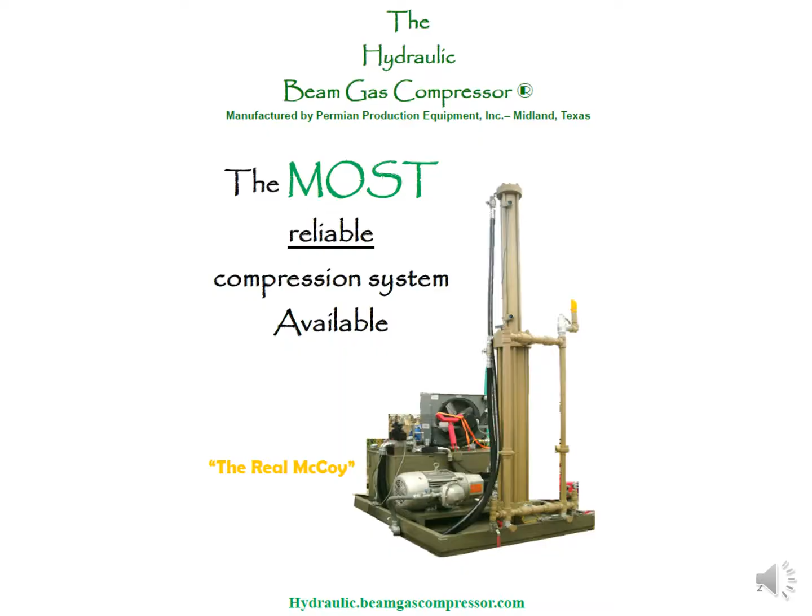You know, but the whole deal about this is all about pressure. Everything you do day in and day out in the oil field is all about pressure. Either you got too much of it or you don't have enough of it. So trying to get rid of it is what man has always been trying to do with oil wells.

You know, but a lot of times oil wells have a mind of their own. And a lot of times they want to get rid of pressure when they want to get rid of pressure. And sometimes you have stuff like this happen, because there's too much pressure in some part and it found a hole. And then sometimes this happens. You know, but everything we're going to talk about is all about pressure. Everything in any of these classes is all about pressure.

And my boss was in the Monahans sand dunes in the 1980s with a Gulf Oil engineer, and they were looking at plunger lift at that time, because that was a big thing for shallow wells. And they drove by a pumping unit, and the pumper had just blown down the well. He had run the piping back through the sand dune so it wouldn't be close to him when he blew it down, because it had H2S in it. But unfortunately a covey of quail happened to be running past at the same time he blew it down, and it killed the birds.

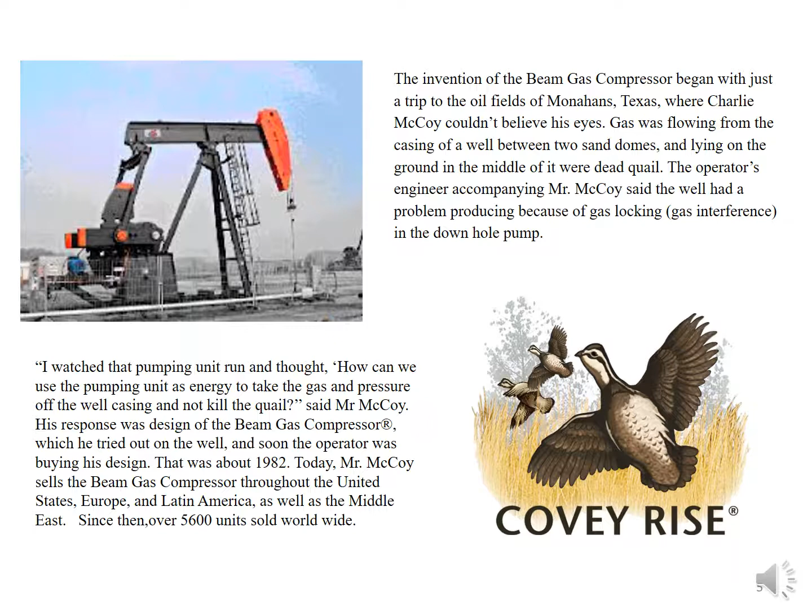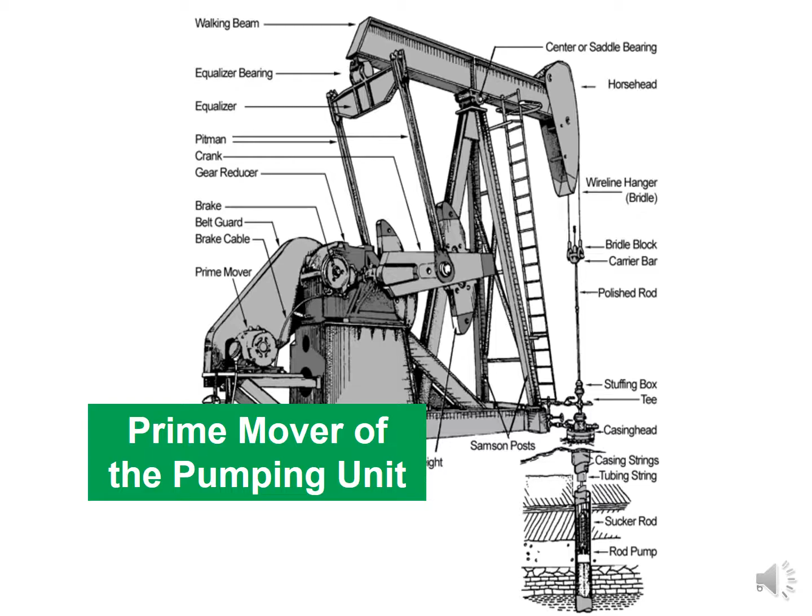And my boss, at that time and still to this day, is a big birder. So from a conservation standpoint, he wanted to know, how can I blow down that well in an environmentally friendly way and not kill the quail? And that's how he came up with the beam compressor, which has been our main product, because he saw that he had this big pumping unit that just goes up and down and hardly needs service, and it just operates and runs. He figured out that he could put a cylinder inside of that structure.

How many ever heard of Arm & Hammer? Arm & Hammer for decades had one product. And then all of a sudden somebody accidentally left it in the refrigerator, and now they had two products. And then that just emerged.

Well, in the 80s, you could not find a brand new pumping unit, because there was an oil rush going on, and Lufkin was pretty much the only choice. So if you had a 640 pumping unit on a well making 5 or 6 barrels a day, and you just drilled a well that needed a pumping unit for 50 or 60 barrels a day, you were screwed. So what Charlie did was create a pneumatic lift system where he put a cylinder over the top of the wellhead, added a piston rod onto your rod string, and stroked that rod pneumatically. That allowed the operator to take that 640 pumping unit and put it somewhere else.

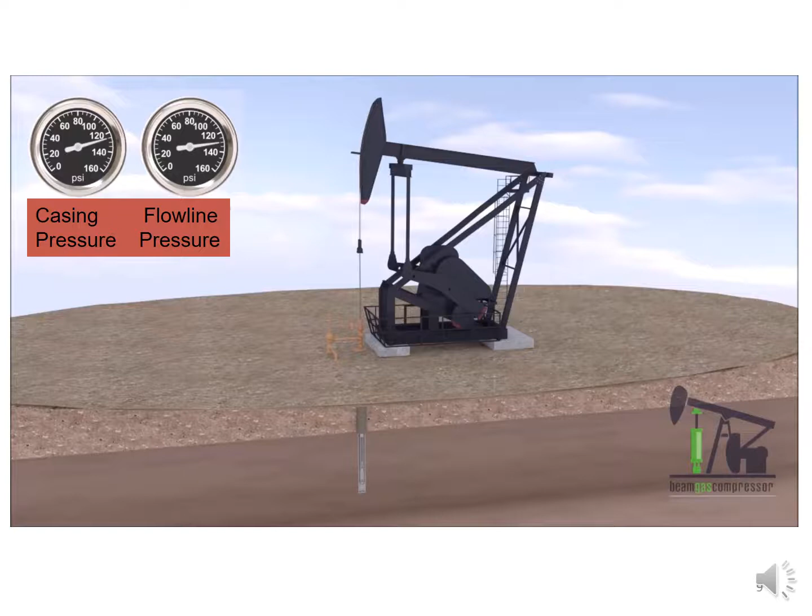So he already had the basic idea that if he just took that pneumatic cylinder and put it inside the structure of the pumping unit, now the pumping unit can give him all the action as it's pulling this piston up and down. And these systems are in all over the world. This is an example of how we work. We're all about, once again, pressure.

Bottom hole pressure is made up of what? Casing pressure and your hydrostatic head. So to lower bottom hole pressure, the simplest thing to do is get rid of the casing pressure. And that's what we do with our systems. So if you had a typical vertical or horizontal well, what you want is to get as much fluid in your pump as possible. But what causes you problems? Gas pressure.

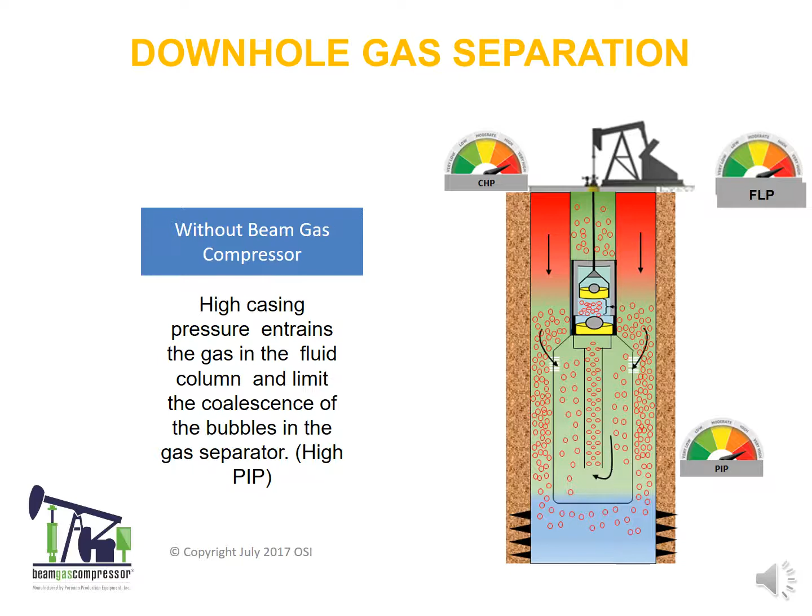Either the gas, because you have high casing pressure, the gas will go into the pump, or it'll just be in a place where you don't want it to be, and it affects your operation. But if you go and get rid of that casing pressure by installing a beam gas compressor, you can drop your suction pressure and discharge into the flow line as before, but now you're giving the casing gas a different place to go because you've taken it off the well.

Now the gas is going to go up the annulus. As the gas goes up the annulus, think about opening a bottle of beer. When you take the top off, instantly foam is created. As the gas bubbles go through the fluid, they create foam. But if you just let that bottle sit there, gas bubbles will continually go through the fluid, and it lets that fluid be less dense. If you just had the bottle with the cap on, the density of that fluid is much more than with the cap off. Same thing for an oil well.

So if you're trying to lower bottom hole pressure by getting rid of casing pressure, you also create less dense fluid. Most horizontal wells you normally run with 1,500 to 2,000 feet of fluid over the pump because you can't pump it down, the gas goes into your pump. Unless you do something else, like get an Odessa separator, a heel system, or a Predator, or something to try to keep the gas from going into the pump.

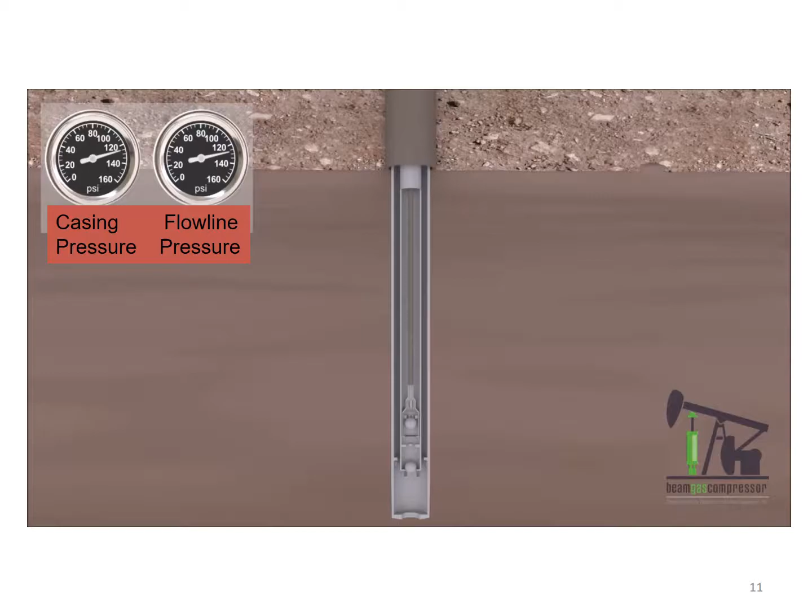What we suggest is let's get rid of the casing pressure first before you go and do something downhole, because it's a whole lot cheaper to work on something on the surface. A lot of people already have a Mother Hubbard in the pump. If you have a Mother Hubbard already below your pump, and we take the casing pressure off, we're going to give you more fluid because we're going to give you a lower bottom hole pressure.

Now the only problem you run into with horizontal wells: we did this for Oxy five years ago. We put 3 compressors on some wells they had in Carlsbad, and at that time they were running 90-foot tailpipes. All we did was make their gas interference worse, because once we took the casing pressure off, the gas wanted to move faster to the well bore, the vertical side.

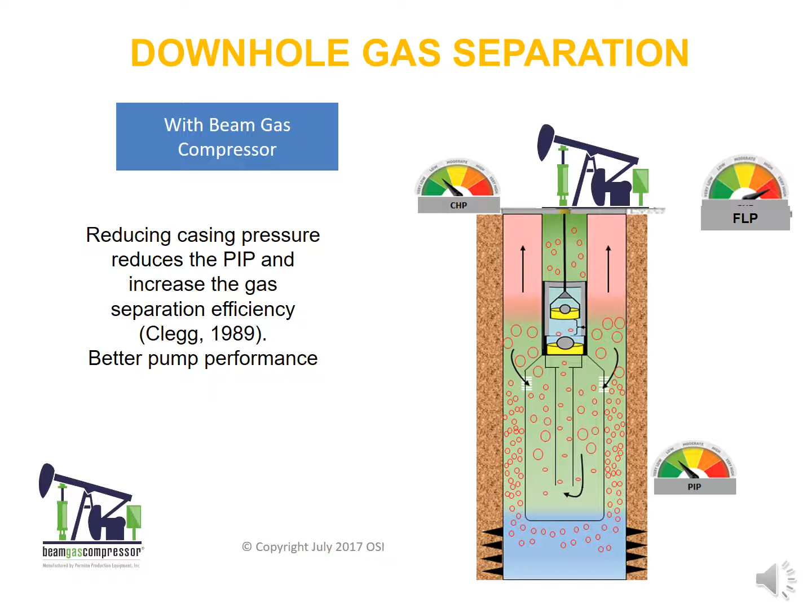And when that pumping unit stroked up, it just created a greater differential and maybe sucked more gas up that tailpipe. I'm sure you've all heard of water getting sucked up the tailpipe - same thing happens with the gas when it goes up that way. And this is the reason.

What we get into with gas and fluid is this - where's my pointer? Now I can use it. These are your gas bubbles when they're entrained in the fluid. They're small. But as soon as we lower the casing pressure above it, we're going to make those bubbles get larger and they're going to move at a faster velocity.

Now, one of the big deals with horizontal wells used to be up in the Bakken was that they'd foam - they produce fluid up the backside. I can take a well that's got 600 pounds of bottom hole pressure, and as soon as I take the casing pressure off of it, it's going to foam.

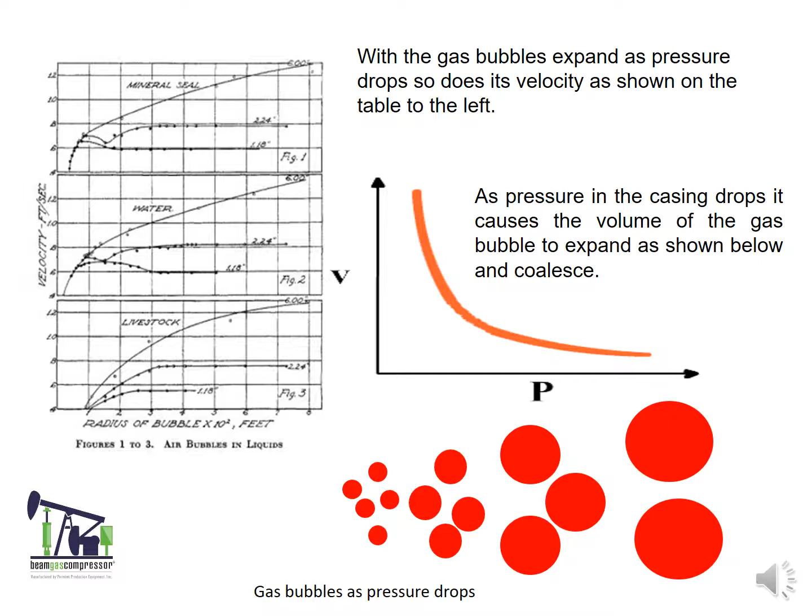Because even if it's 7,000, 8,000 feet deep, when I take that gas off, I'm going to make gas push that fluid to the surface, and it's going to come right up along the casing in the annulus. And my compressor doesn't really like that, because our beam gas compressors were designed to have relatively dry gas. We can handle high BTU gas, but if you send me a slug of fluid, I'm not going to like that.

But on a horizontal well, you have a well that already has a tendency to foam. And it has a tendency to foam because you have this long corridor of fluid and gas constantly going through it. It just keeps getting agitated, that's all that's going on. It's not really because the fluid wants to foam, it's just because you've got so much of it and gas rushing through it, it's going to foam.

So when we take the casing pressure off, we're going to make that even worse unless we figure out how to stop that.

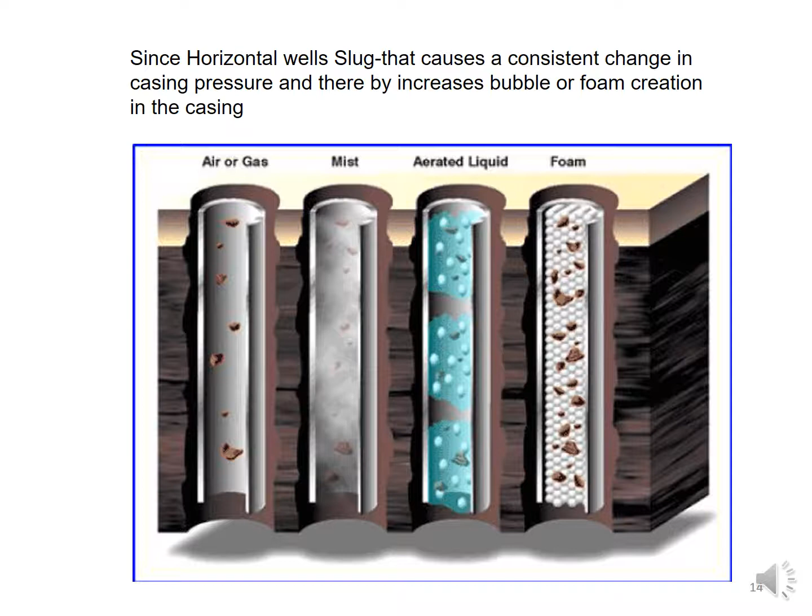So this is a well for EOG up in North Dakota. They had a horizontal well making about 150 MCF of gas. So what they did, they hooked the beam gas compressor to discharge the gas back in on this side. The operator took this video, but he started backwards, starting from the back end.

Here's the line going up to the beam gas compressor. They're non-lubricated, so pretty much they just sit there and run. There's not a whole lot to mess with on them. Then you come down here, here's the suction side. That's my boss there standing in the way of the filming. And here's the suction line where we suck the gas off of that line.

Because it's a horizontal well and they had 750, 800 pounds of bottom hole pressure, we had them put a vessel over here on the side so it would capture any fluid that came up. The cost for us doing this is about $25,000, and then the vessel, they just had one out in their yard. So here, we can lower casing pressure very well on a horizontal well as long as we got some way to keep the fluid from, when it comes to surface, so we can stop it. But that gets to be problematic.

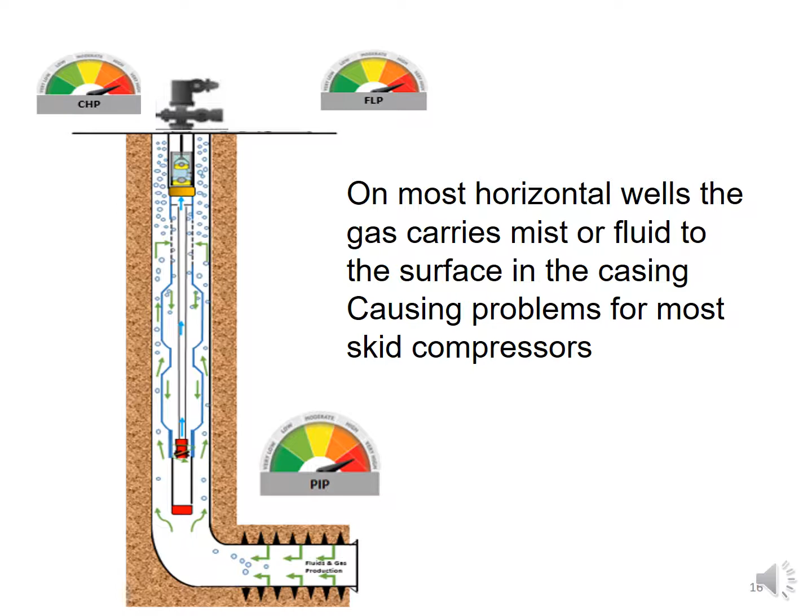What we started looking at, okay, now here you have a horizontal well. This has an Odessa separator in it. They've got casing pressure, flow line pressure, bottom hole pressure, pump intake pressure. But as soon as we take that pressure off, we're going to make everything work better because we get more pumping pressure, but we also start slugging that well a little bit more.

So what we designed was a hydraulic system to go on top of the wellhead instead of going on the pumping unit. And the hydraulic system, you'll see here later, is really slick because we don't care if I get straight fluid, straight gas, or a mixture, because I can move it. Typically all I'm trying to do is move it from off the annulus and back into the wellhead so that this horizontal well can continue to produce.

Now we talked about pressure. How many of you guys run ESPs? What's the worst thing in the world to happen with an ESP? Casing pressure go from 100 pounds to 200 pounds, or 100 pounds to 20 pounds - you know, they don't like that. Most wells don't. And if you put a typical skid compressor on the surface on an ESP and you pull the backside on, you're going to do real well for a period of time until the scrubber tank fills up.

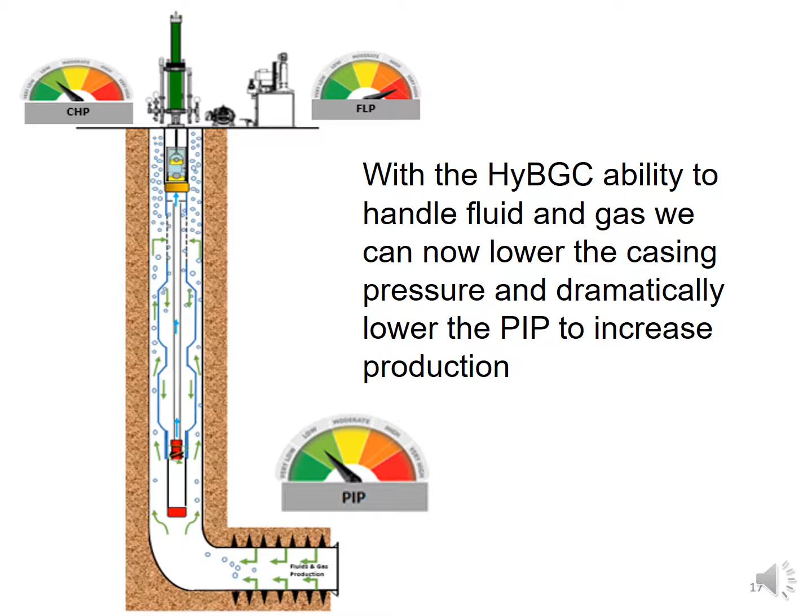And then that scrubber tank, once it fills up, it's going to do something. If it's through automation, it might have to pump all that fluid out, but more often than not it shuts down. And when it shuts down, your casing pressure goes back up. So that's really not a good thing for your ESP or your downhole equipment.

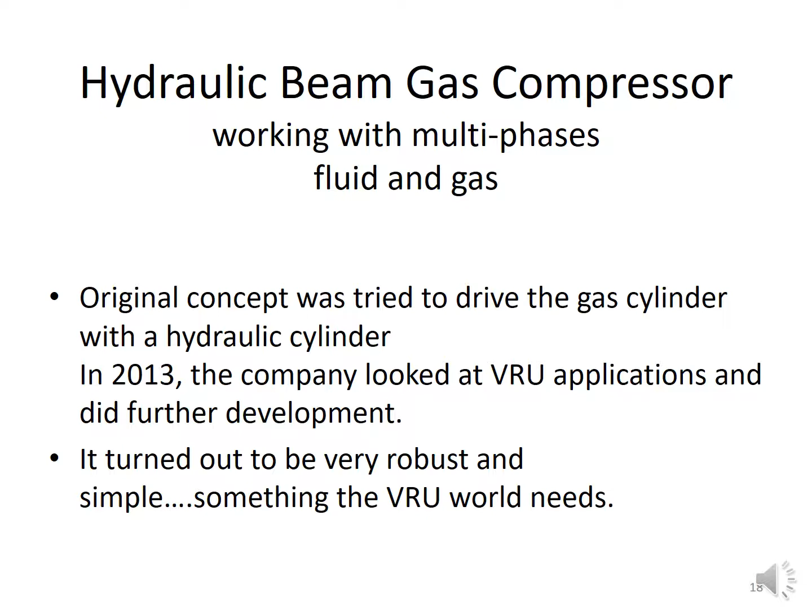So what we started doing, actually about 15 years ago, was developing a method that we could drive our beam compressor - that's been around for 40 years - with a system that's been around for 100 years. This hydraulics has been around forever.

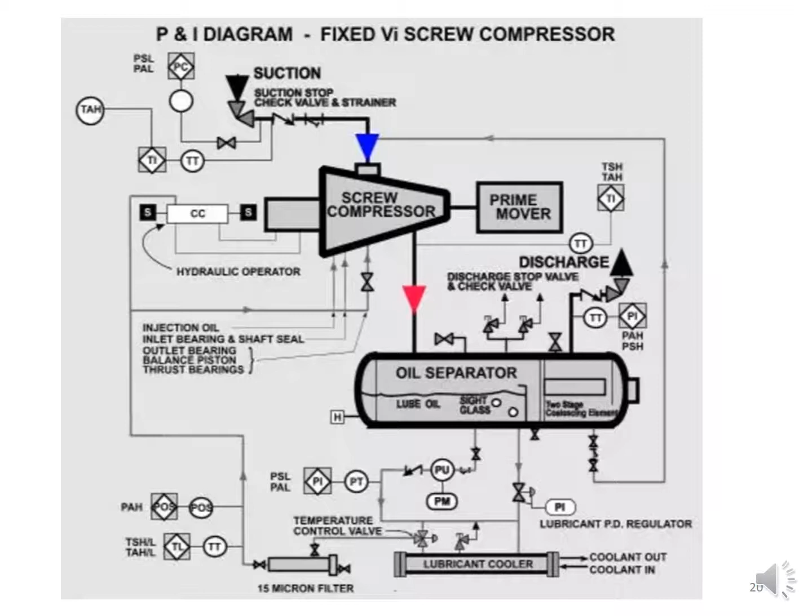This is the difference - these are all the different things that we don't have to have compared to our competitor. The thing I think about the most is that we're very simple. I like to consider myself simple-minded, and simple is a whole lot easier. With this type of system, you don't need one mechanic for every 6 units - you can have one mechanic for hundreds, because the problems you're going to have are yearly, not weekly or month by month.

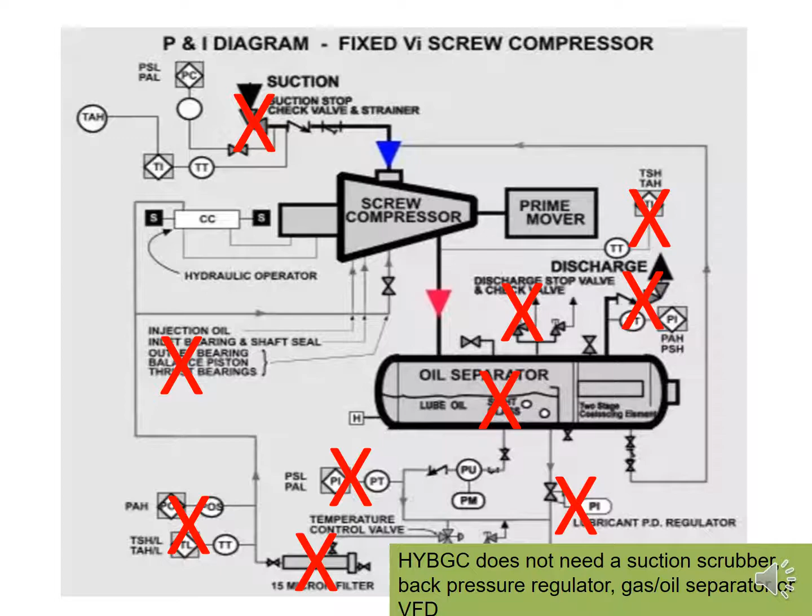So we might short stroke for a period of time until we push all the fluid out. We might raise the casing pressure - instead of it being at 5, it might go to 7 or 10 until we get all the fluid out. But we don't have to worry about it.

One of the big applications for horizontal wells - I don't think I've seen it too much in the Permian - is allocation separators. When you have 6, 7, 8, 10 well pads, normally the Railroad Commission likes to know how much each well is making. So the solution has normally been that you take this big allocation separator, set it on your big pad, and drive all your fluid into there so you can measure everything going to that allocation separator.

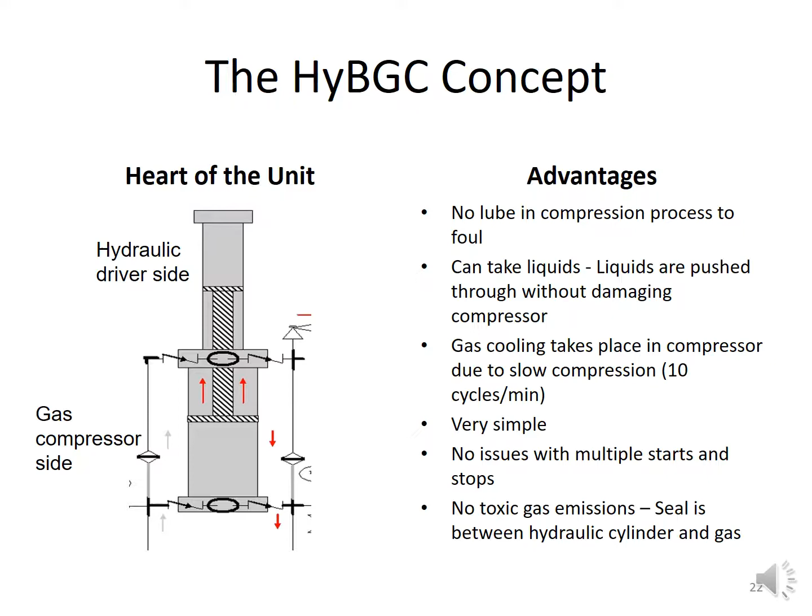Then the allocation separator has to build pressure to send that fluid to a battery. But as soon as you build pressure in that allocation separator, you're building pressure on all your well bores. By putting my system on the outside of that allocation separator, I can lower the pressure in the allocation separator to 15 pounds, whatever it takes to dump, and lower the pressure to all of the wells in the pad. Then I can compress the gas back in the flow line and use that to push back up to 200 or 250 pounds to push all the fluid to where you're trying to get it to. With one simple thing, I can increase production on a large number of wells.

So this is what happens - how many are familiar with hydraulics? You see it all the time on the garbage truck, with all these devices that have rams and stuff, and they just work. There's just not much to them.

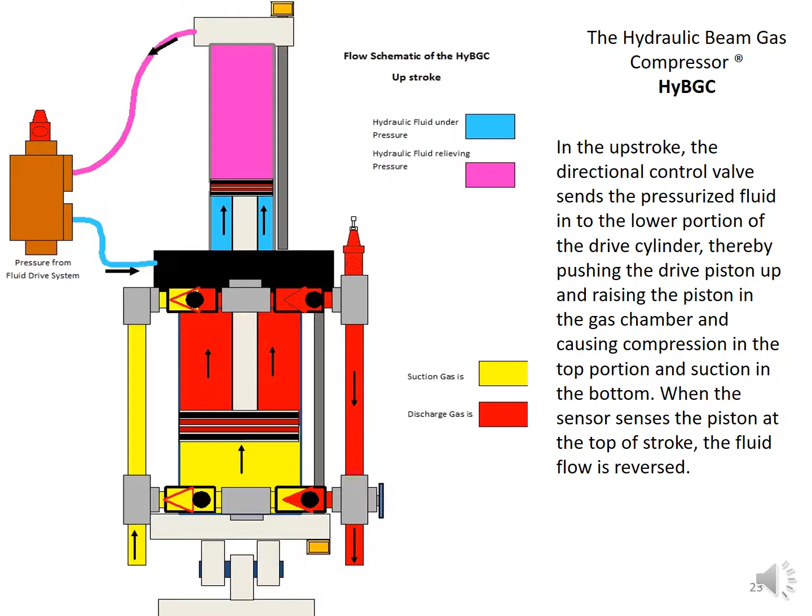The heart of it is the directional valve, which basically either goes this way or that way. If it goes this way, it's sending fluid to the bottom of my device. If it goes this way, it's sending fluid to the top of my device. Depending on which way it's going, that depends on which way this moves. So right now it's going up, and now it's going down - that's the action of the system.

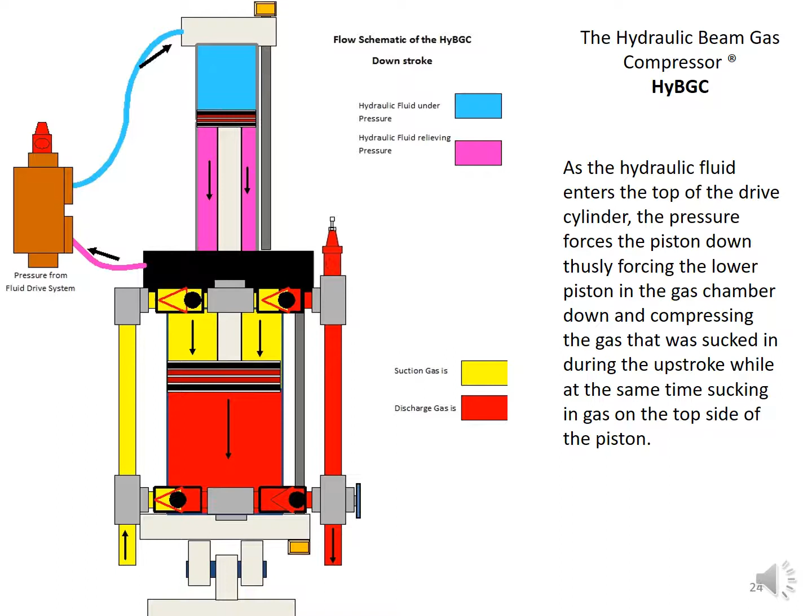There's really nothing more complicated than what I've just shown you. It has 4 check valves and a pressure release valve on it. But one of the interesting things about it is we're dual acting, just like our beam gas compressors were - we compress up and down. But if we get fluid in it, what happens?

All we do is just keep on running. So we're sucking straight fluid. We've had customers buy them, like in Alaska, just to move fluid off of a Rotaflex.

It's not going to bother our system because we design it to run with the fluid. We don't need to scrub it out. We don't need to have dry gas going into the compressor. None of that's worrisome to us.

Because inside the structure of the hydraulic system, we have a proportional valve, that directional valve I showed you. How much the valve goes left or right depends on what kind of suction pressure, how fast I want it to go. You guys are typically used to variable frequency drives, but most people don't like VFDs because they're a pain in the ass. They're very persnickety.

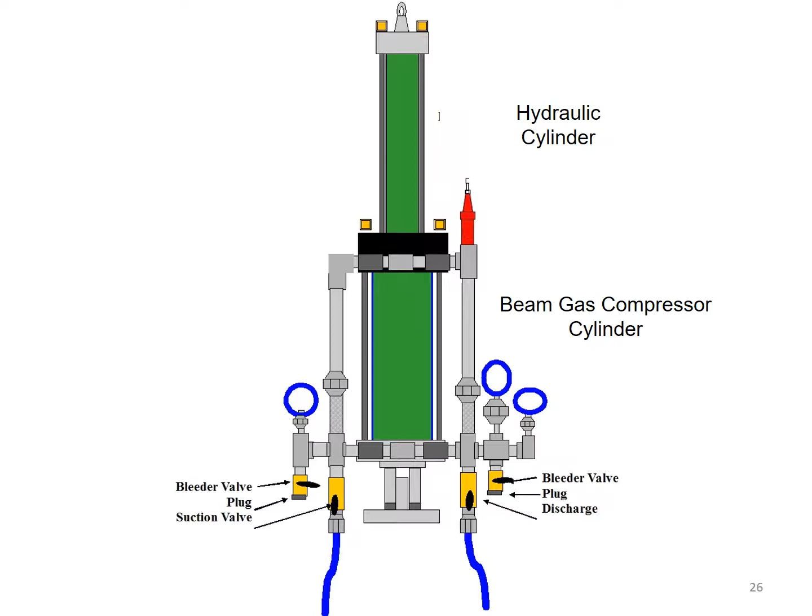Well, here we can take a proportional valve, and depending upon whatever kind of programming you have, we tell that proportional valve - it's a 4 to 20 milliamp signal. Depending on how far you want it open, that tells the valve how much fluid to send to the system. Sends more fluid, I go up and down faster. If I don't need to go that fast, it sends less fluid and I just go slower. But I don't require anything super special like a VFD in order to accomplish that.

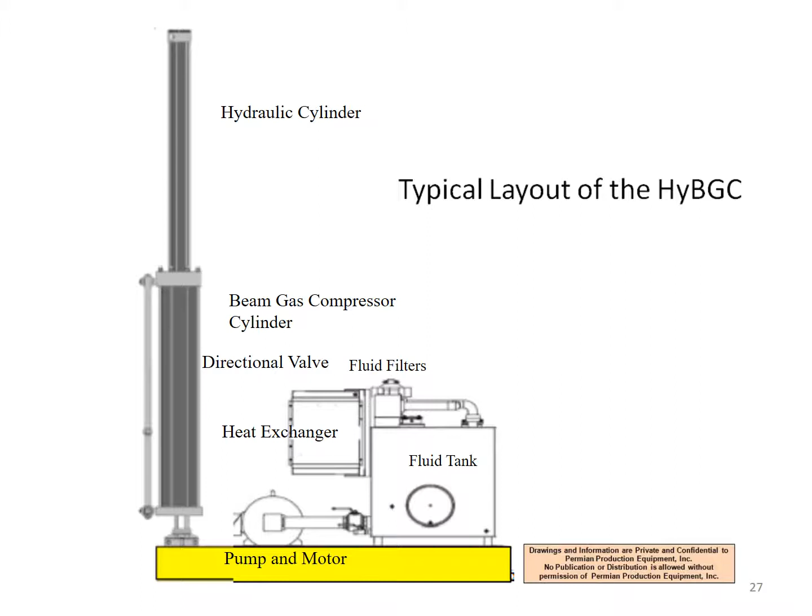We do not provide you a control system because you already have people trained for that or used to that. We can use a Lufkin SAM unit, or whatever they call it nowadays - well control, Allen Bradley, anything that can give me 5 analog ports that I can plug a transmitter to, and I can tell a motor to come on. We've done it with Murphy switches. It's just to make it really, really simple.

So they still had to have a cost, but it was almost half of what our competitors are. Maintenance on compressors equals lost production to an operator - the more maintenance a compressor needs, the less production.

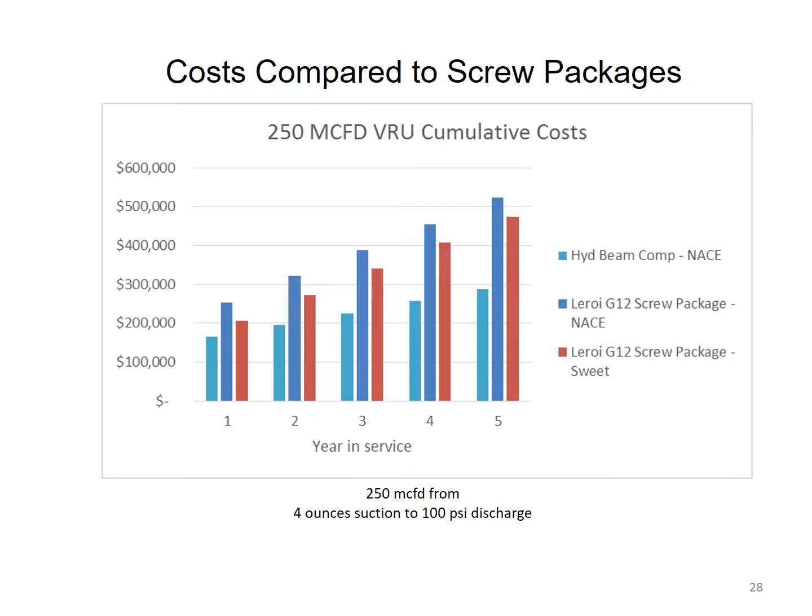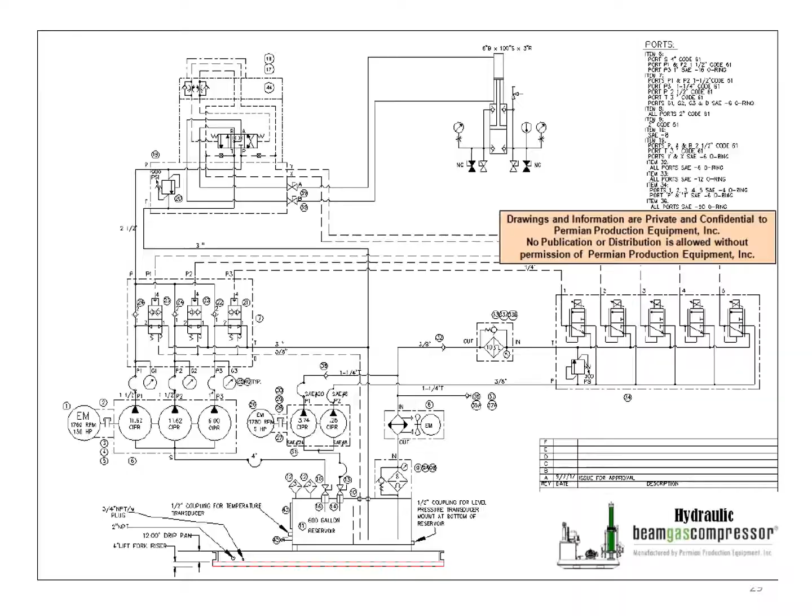All of our systems are basically H2S compliant, regardless of what you're looking at. You know, NACE compliance to us, we're really already there. There's nothing we change to get to be NACE compliant. Gas is going to come into our system, and everything's stainless steel already, 3,000 pounds. So there's nothing we really have to change that's wetted by gas that has to be NACE. Whereas other compressors, they have a lot of components they have to change out.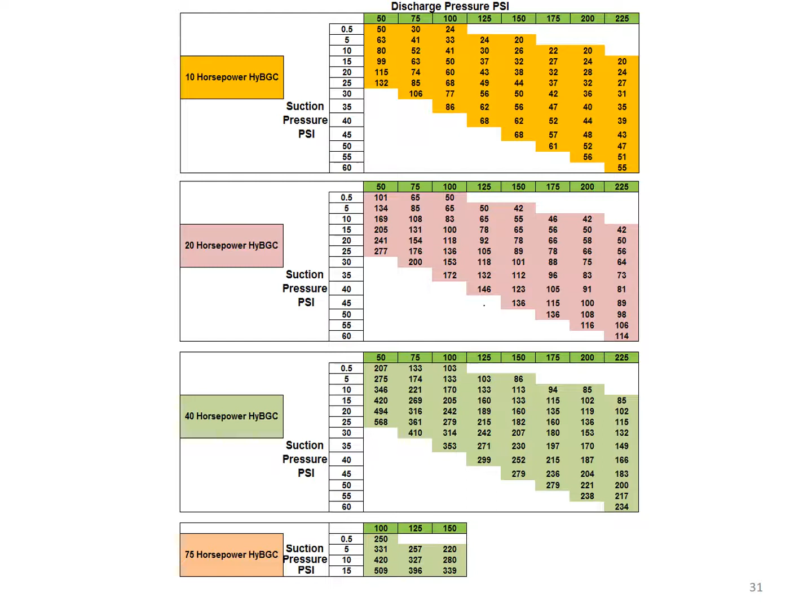But it's a fairly simple concept. I said simple a couple of times. I like to.

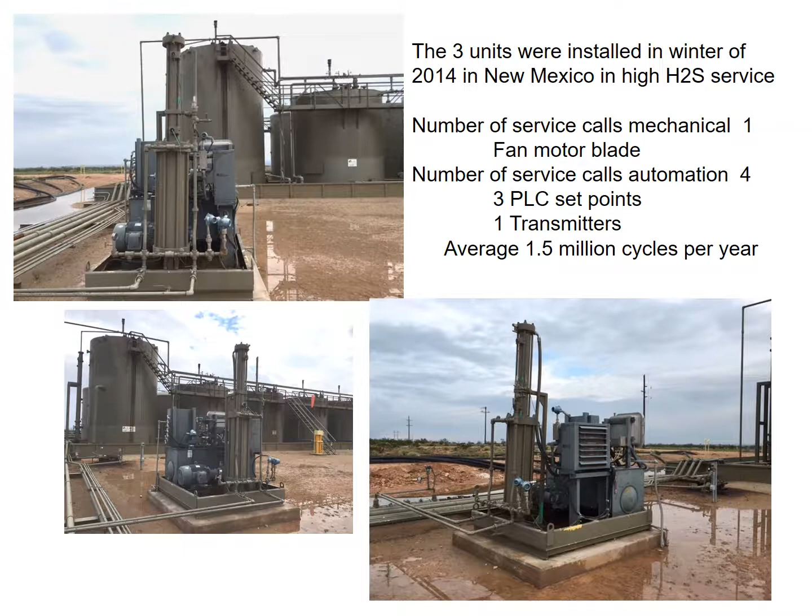These are some different wells that we've got it on. It rained in New Mexico this day, last year I guess sometime. It's just a vapor recovery unit, they just plumb it in, and it just sort of sits there. Now this operator, this is the Allen Bradley panel they put on there, but now they don't put it on there anymore because when they were first doing this, they put it on the skid, and they had to have a Div 1 explosion-proof panel and stuff, and that was just ridiculous.

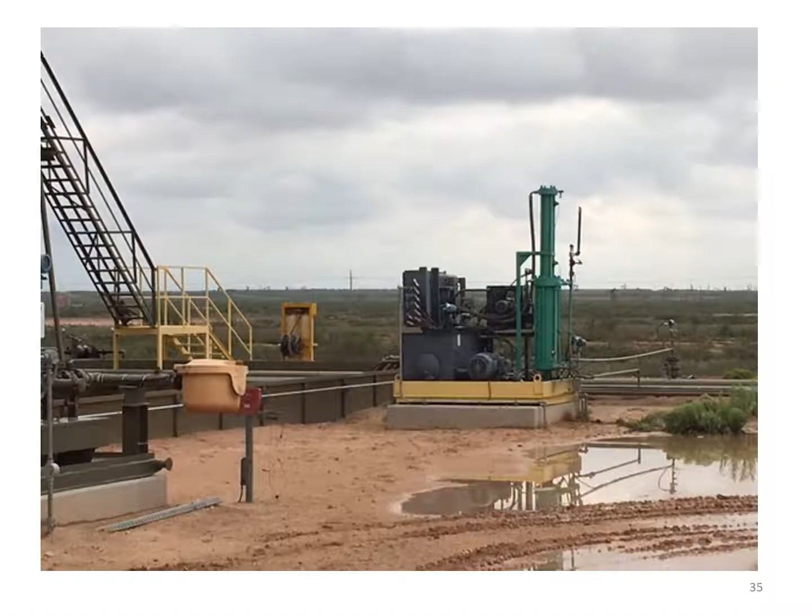There's another one. This is one out here in Odessa. This is one out in Andrews. This was interesting because...

One of the things that happens with gas when you compress it is it gets hot. Most skid compressors run at 3 to 4 ratios of compression, and the reason they run at that ratio is because if they ran faster, they'd get too hot. Well, we run at 9 ratios of compression. Hot is not an issue to us.

My system runs at 5 to 9 cycles a minute. A skid compressor runs at 1,500 cycles a minute. When something's going back and forth that fast, it's going to get hot. With my system, every time I stroke up, I'm drawing cooler gas into the cylinder. Then when I push down, I heat up the cylinder for a split second, but then I'm pulling cool gas back into it. Because there's large volumes of gas, and because I'm running at 9 cycles as opposed to 1500, I don't have the problem with heating the gas up.

So what happens when you heat up gas in West Texas? As soon as it hits the sales line, it cools off, and as soon as it cools off, if it's got any BTU in there, it's going to form condensate. Now you're pushing condensate to your gas plant, and they sort of don't like that. With our compressor, because we're not going to heat up the gas, we're not going to allow the BTUs to drop out. So we just push the gas down, and we don't have any issues with that.

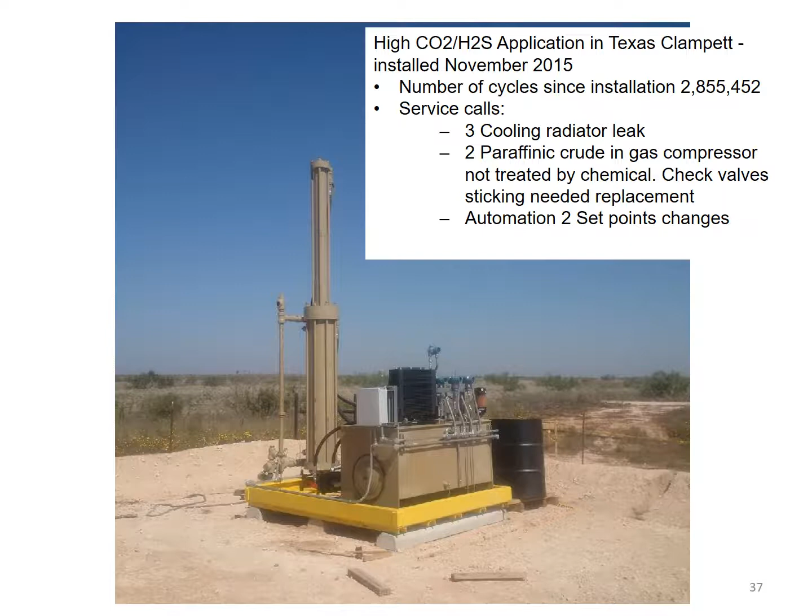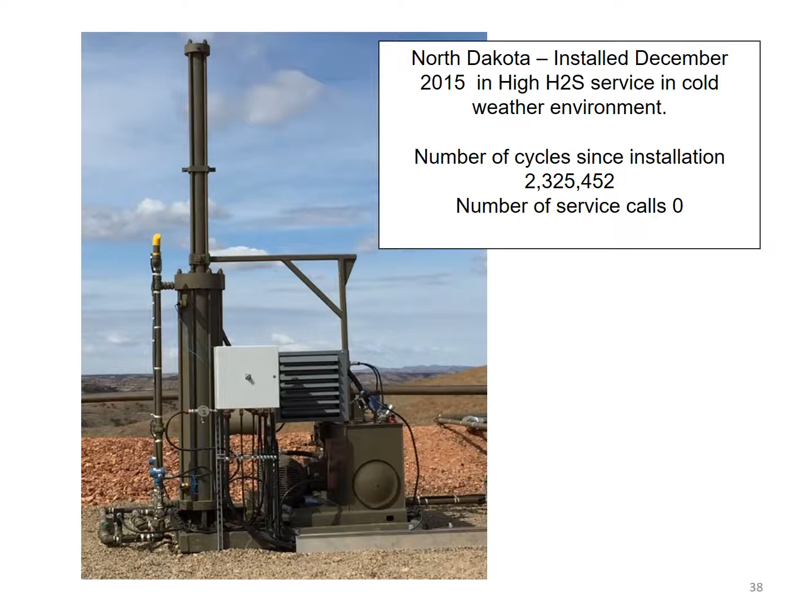It's been working, I guess, when did we put it in? 2015, so it's still operational. And they have yet to pick up the phone and say, Mark, it broke. Because there's just nothing to break, there's just not that much in it.

This is one of our larger systems where we have a 150 horsepower motor. This is a triple vane pump. And this compressor is 100 inches tall, which makes this 100 inches tall, which means this whole thing is real tall. But real tall is okay on most oil pads, tall is not that big of a deal.

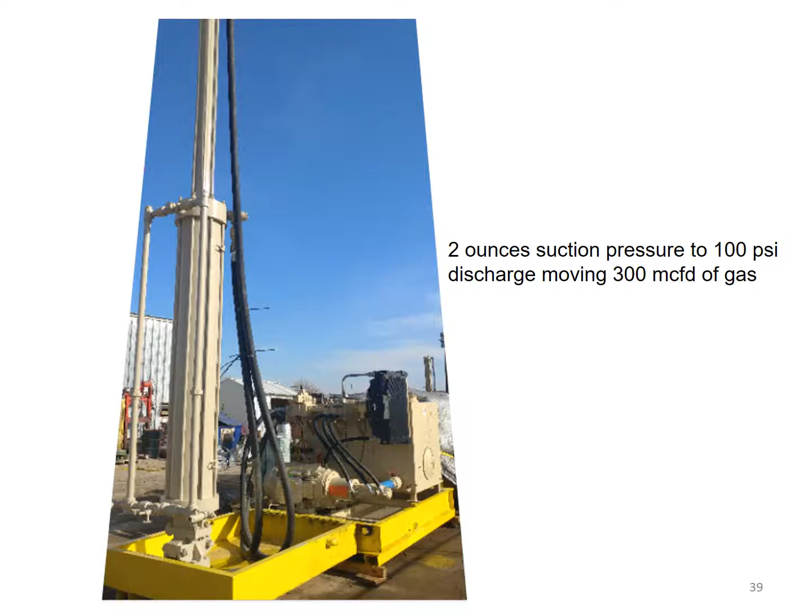And we put it in multiple pans, depending on how much fluid we're going to have, so we have a capacity to hold fluid in the worst case scenario if we get a leak.

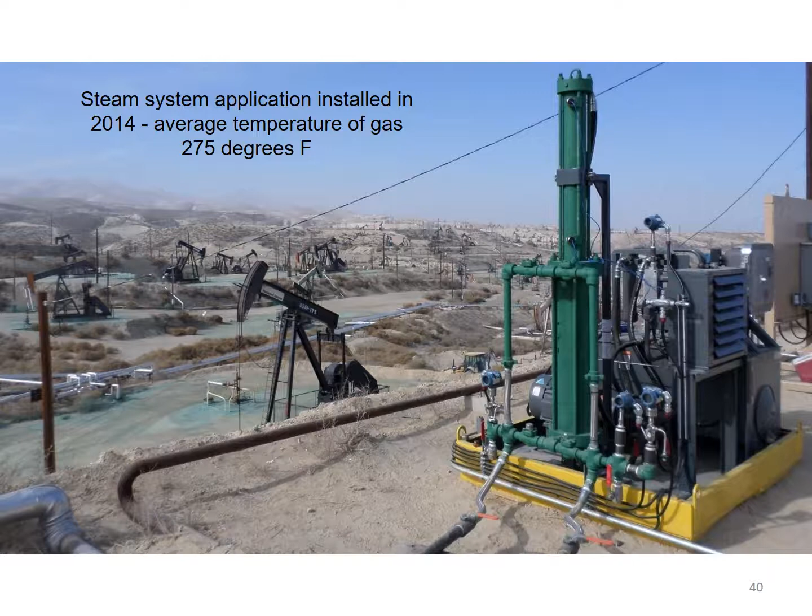This is the well I was talking about that we do for Chevron. This is out in Bakersfield, and they put a unit here so that they can take gas off of 5 different wells as they steamed them up.

Many of you have heard the term blow-by. On a skid compressor, blow-by is a big deal with the EPA, because if you have that piston pushing and compressing gas, gas will seep around that piston seal and go out to atmosphere. It's just going to happen, you're not going to be able to stop it all. So a lot of compressor systems put a different exhaust thing on there so they can capture that and resend it in if they're gas fired, so they can reburn it, or they've got to do a lot of extra stuff for that. I don't worry about it.

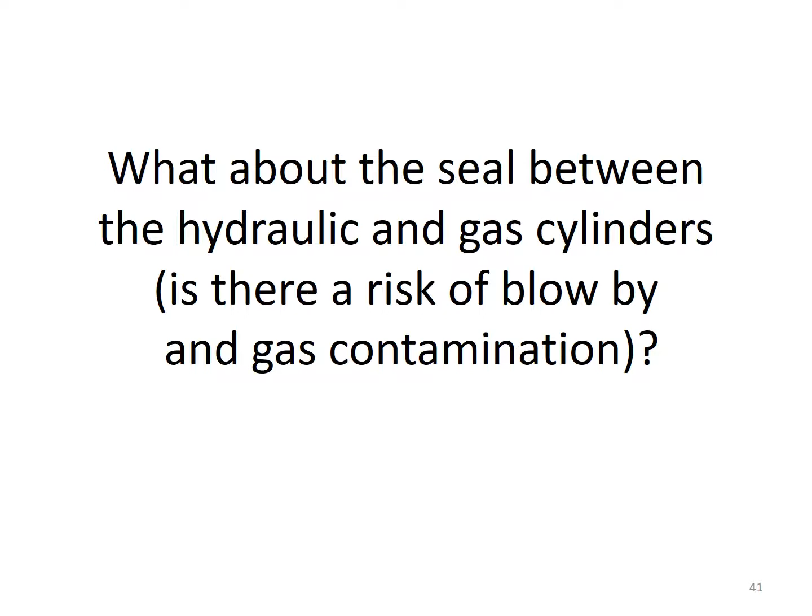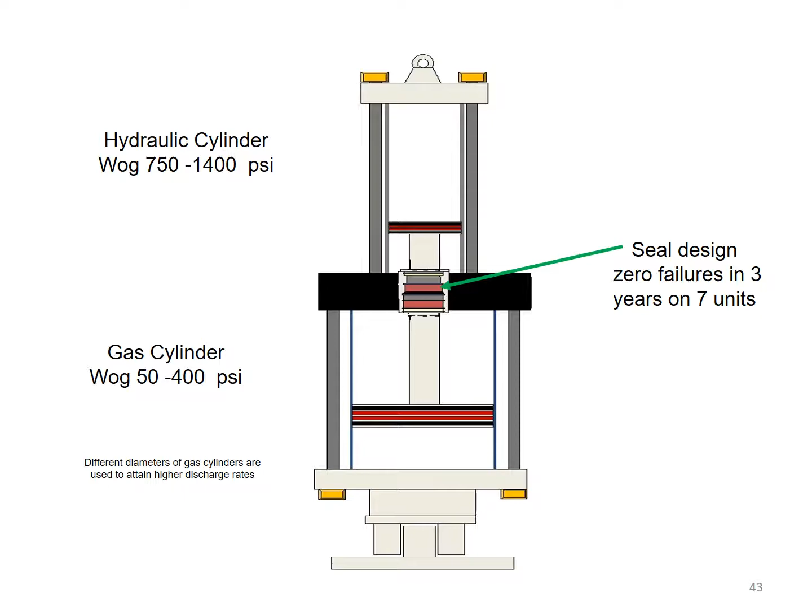The reason I don't worry about it is that we have a triple redundant seal in our middle head. So this is where our middle head is. The hydraulic cylinder runs at 750 to 1400 pounds of pressure, so it's pushing down pretty hard. The gas side will barely ever get over 400, so our seal is constantly closed, so gas can't escape this way. From the point where the gas comes in and the gas leaves, there's really nowhere for the gas to ever escape our compressor. If the EPA came by with one of their FLIR cameras, they're not going to see any gas escaping from my stuff. Your stuff, I'm not going to say nothing about. But my stuff, I'm not worried about.

So we got it on service. Now this is the deal in California where they had multiple wells they were steaming, and they hooked up multiple units so they could go ahead and pull it off of multiple wells. In some places, some of the steam floods, they'll steam them for a longer period of time. They just go and mount them on a trailer so they can haul it around. Because once they pull that 100 pounds of pressure off the well, it's not going to get any more pressure because it's dead oil, so it doesn't have to sit there full time. It just needs to be there long enough to pull the pressure off after they've released the gas.

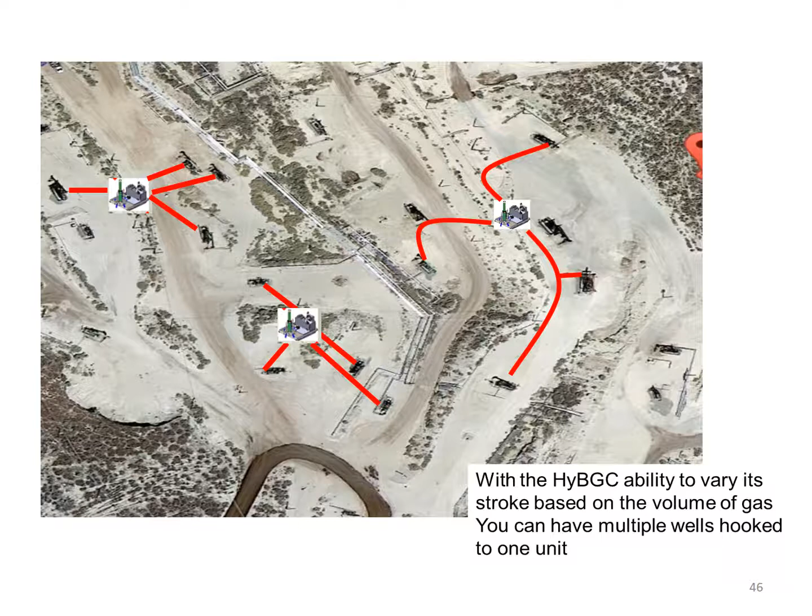ESPs, I think on an ESP this system works remarkably well. We've done a few, but most of them have been in the Middle East. In the example in the Middle East, how many of you ever designed an ESP? Don't you design it for gas interference? Why? Because you don't have a way to get rid of the gas. So if I have a way to get rid of the casing pressure in the annulus, the odds are the gas interference in your ESP is going to be considerably less. If I have less casing pressure, I'm going to have lower bottom hole pressure, so it's going to make your ESP run more efficiently, and it's going to allow you to have greater pump fillage on that ESP with less hertz to do the same work. And if an ESP uses less hertz, I would think it works for a little while longer.

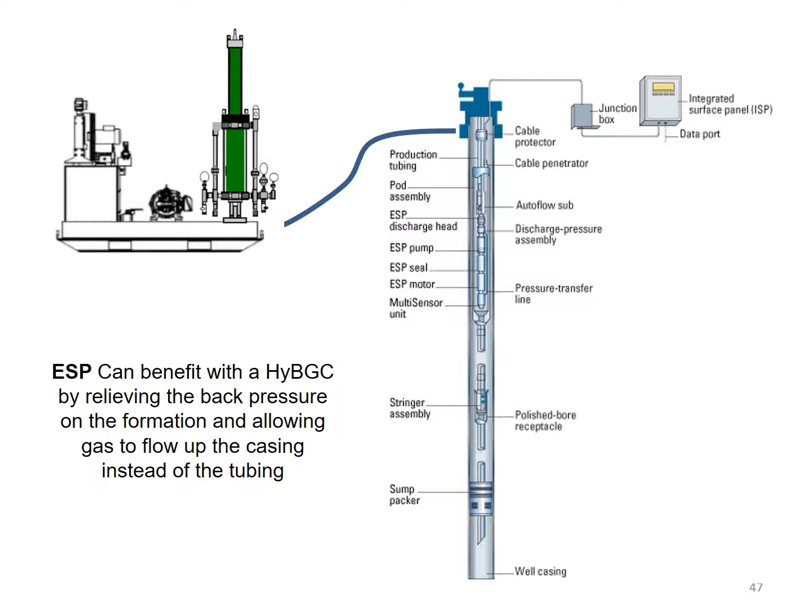In Mississippi, we did this one time where the guy had all of his wells run on propane. They had a central place where they pumped all the propane to those locations, but the problem was in the winter, those propane lines would get cold and the propane would drop a lot of fluid out, and then the fluid would freeze. They just ran into a lot of problems. So here, because I can run with wet or dry, I can push everything and we could keep it constantly running.

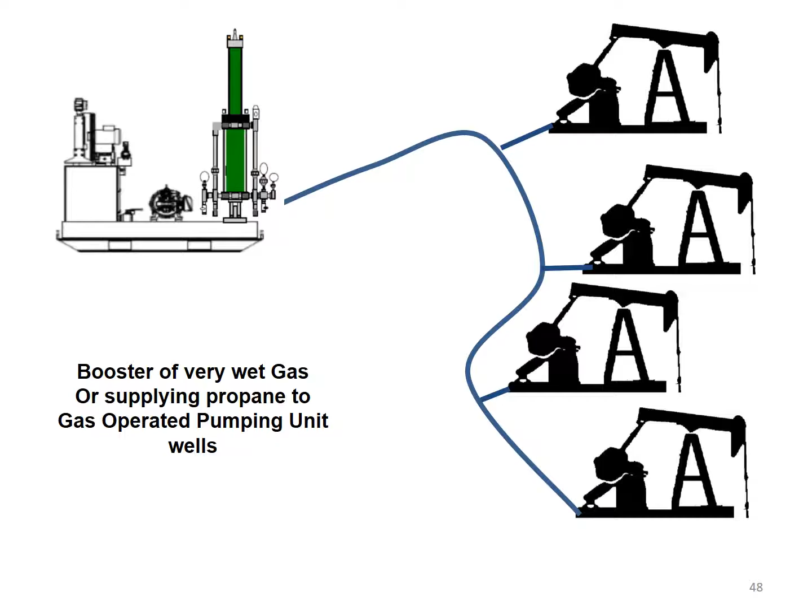It's an interesting system. We had in Colombia, we do all the work for Ecopetrol, and they were looking at setting a really large compressor for $4.5 million to move a million cubic feet of gas a day. Maybe that's the wrong number. But we just went and put 20 of our units in there. We just manifolded them together. Our cost was a third of what the one compressor was.

But then we also told them and showed them, because we had an extra system in our 20 units, since we only had 19 run at any time, that if any of them needed to be serviced, we would just turn on that 20th one. So now instead of having 99.9% runtime with our system, they've got 100% runtime because they've got a constant backup. Whereas with the other one, when their one big compressor went down, they would lose a lot of production. And obviously it's going to go down because you've got to maintain it, not to say whether it just actually breaks.